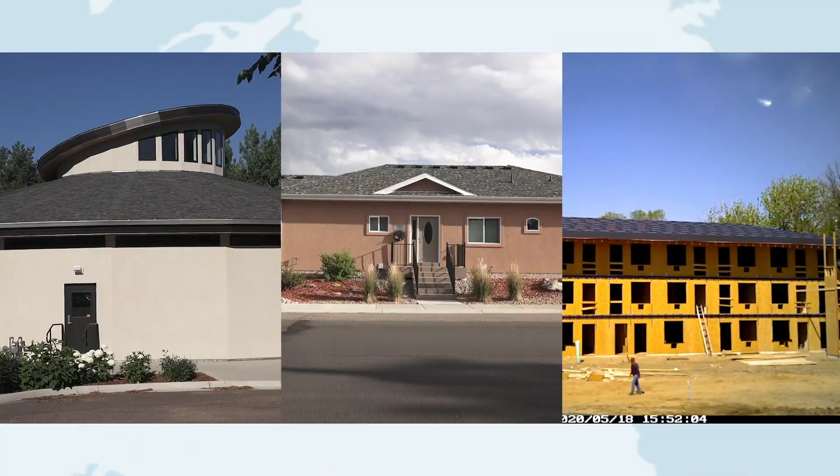Hi, I'm Paul Kreischer. For the past quarter of a century, I've worked to create more energy efficient homes and buildings. I'm fascinated by the technical aspects and cutting edge ideas from people who are pushing the boundaries in their projects. Equally important to me is the why behind the plan. What's the motivation for these individuals to make the effort, take the time, pay the additional money to take on sustainable and regenerative design and construction in their projects?

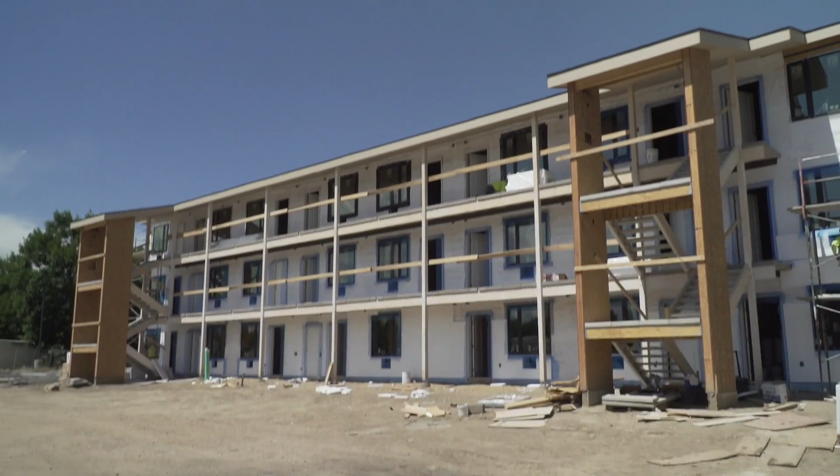We're going to take you on a journey to explore 3 unique construction projects: a church remodel commercial building, an innovative single-family home, and an exceptional multifamily building. Explore the design and the desire for each one to be examples of creating the buildings of tomorrow today, and to leave the world a little better than how they found it.

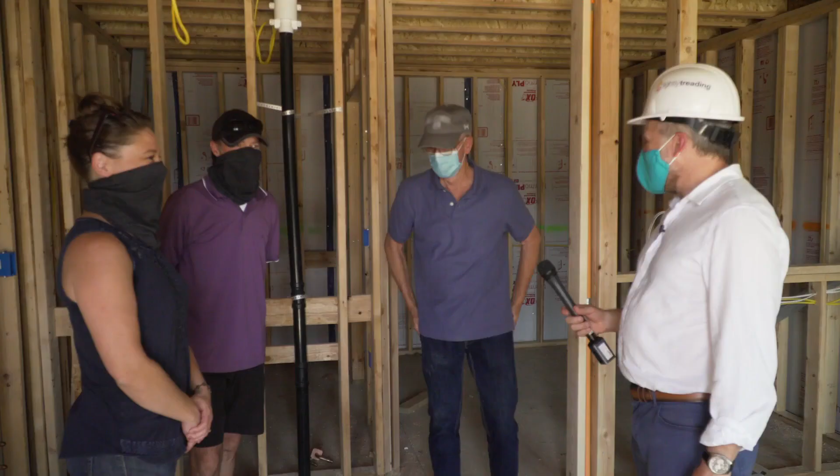When we recorded this video, we were 4 months into the US response to COVID-19. Shortly after restaurants began to open, but steps were still being taken for social distancing, and you'll see me and interviewees occasionally wearing masks as we move through these buildings. These precautions were done to protect the well-being of others and reminded me as to how we are all connected and need to truly care for one another as we move through life.

This connection between all of us is the fundamental reason for our videos, to showcase buildings which provide for our and all creation's greatest good by using less resources while delivering optimal performance for the occupants. May we all be well.

First Universalist Church members in Denver are a great example of living their values through the renovation of their building. The whole congregation got together and decided to shoot for zero emission, not an easy or cheap goal, but one they truly believed in. Let's head inside and find out more from these amazing people. We're talking to church members John Bringenberg and Milt Hetrick, Reverend Dr. Elaine Paraslua, and Communications Coordinator Jessica Montgomery about their goal to design a zero carbon footprint building. And while this green light has nothing to do with sustainability, it's a very cool design feature. Find out what it is a little bit later.

So Milt, if you'd be so kind, you have a brilliant mind in applied engineering that you did in helping this project come together, but tell us a little bit of your background, all the good street cred that you had through the schooling and work that you've done before quasi-retiring and then working on a project like this. Well, I got my engineering degree in aerospace, and I spent probably the first 10 years in aerospace. Left the industry and went into the oil and gas field for about 3 years. Was involved in some oil shale technology. Then ended up going back to aerospace where I retired. And in the meantime, I also got a degree in physics. So little did I know I was going to be applying it to a church project. And you did great work with it.

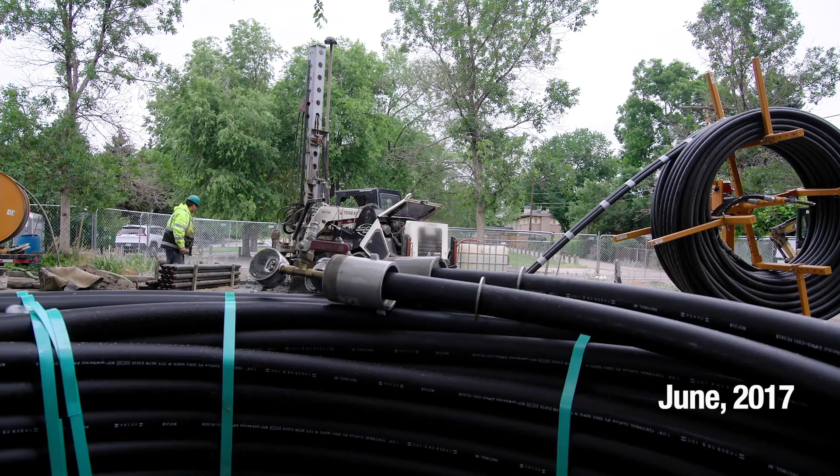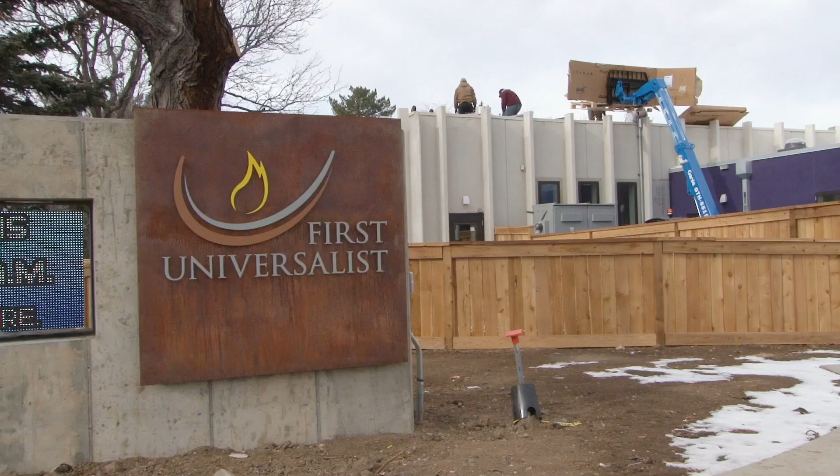So related to the church project, can you tell me briefly why you, the congregation, the people working on this, chose to do such a high-performance building instead of simply meeting code, like so many other projects? Sure. This project, we have to go back and recall that it got started around 2015. And at that point in time, the global community was becoming very concerned about the climate crisis, global warming, and that was the year of COP21 and the Paris Agreement, where the global community made an agreement to reduce greenhouse gas emissions and limit global warming to 1.5 or 2 degrees. So that was the big picture that was going on at the time this project got started.

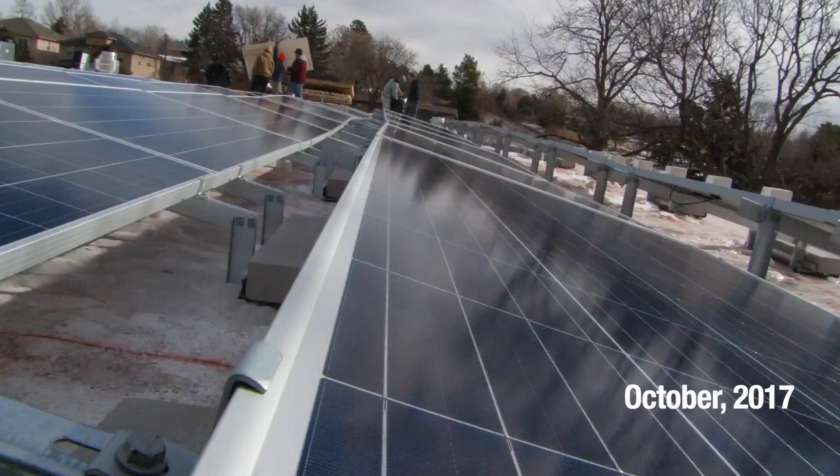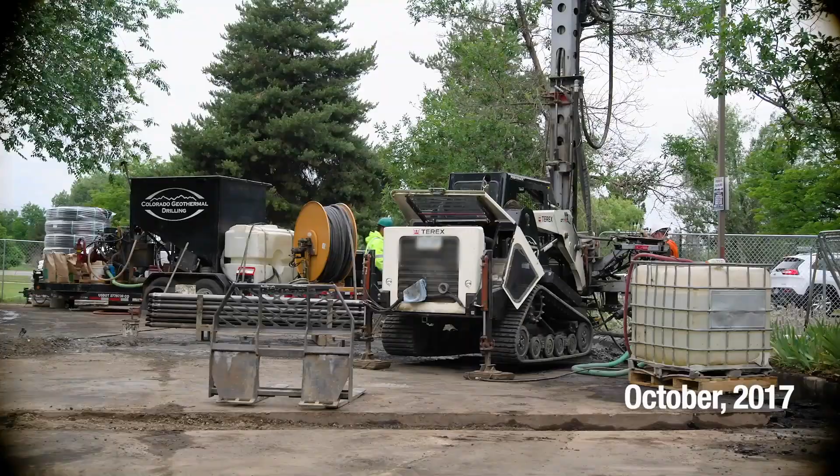Now, if we come down a little bit, our religious denomination, the Unitarian Universalist Association, had published what we refer to as statements of conscience. Within this church, we had a small group of environmental activists that we called the Green First Task Force. We were concerned about the growth of our congregation and that we needed more space, more classrooms, a bigger sanctuary. And so we initiated a building renovation project. And one of the members of our task force, John Bringenberg, got himself positioned on the building committee and made sure that we had sustainability perspectives as design requirements for this renovation project.

You know a lot about this building, about the whole process, but what I'm really fascinated by in this project was the why people came together to do this great project.

When you have a church community, you have a unique people environment to make decisions of this kind. We, of course, have to think about the economic impacts of energy decisions when we're redesigning this building. But being in a church community, you have the opportunity to bring in another dimension, something that maybe doesn't exist in a normal commercial business, for example. And in our case, that's what we call our seventh principle.

This amazing building is a manifestation of many beautiful principles and values that come from the Unitarian Universalist Church, and I'd love to learn more about that. I would say the general value of Unitarian Universalism is to live your faith, to live out the principles, and we have 7 of them, and they are about democracy, about how you treat one another, the dignity and worth of every human. But the one that's important to this project is the 7th principle, and that one is we are all part of an interdependent web of all life, and that we are to recognize our equity with all other beings, sentient and not, and the earth, and to care for the earth as stewards.

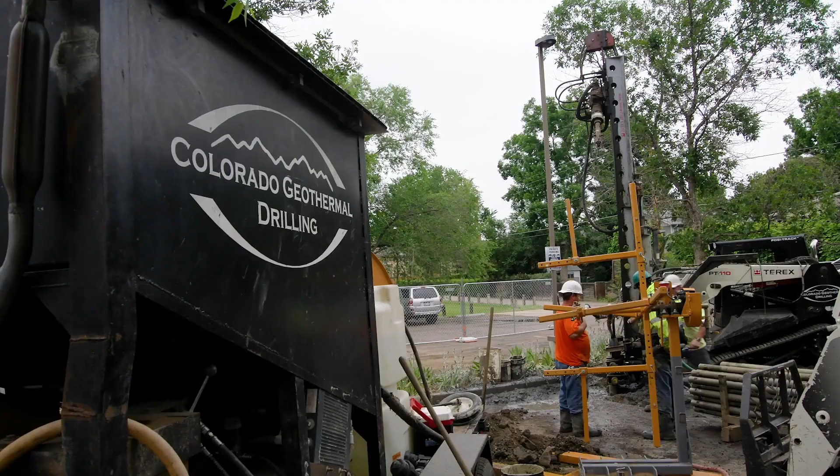Can you tell me a little bit about the story and the process of how people came together, especially around the funding portions of this project, to make it happen? Because it's a great story. It is, yes. We had a capital campaign for the building renovation well underway, and working with the architects, when a member-driven initiative, a very bold one, came up to add a sustainable energy system, and also add the cost for a sustainable energy system. It's challenging for several reasons. First off, it added more than 10% to the cost of the total building project. And being understandably debt avoidant, the church just asked, can we go ask for additional gifts specifically for the sustainable energy system, and then close the gap as needed with a member loan.

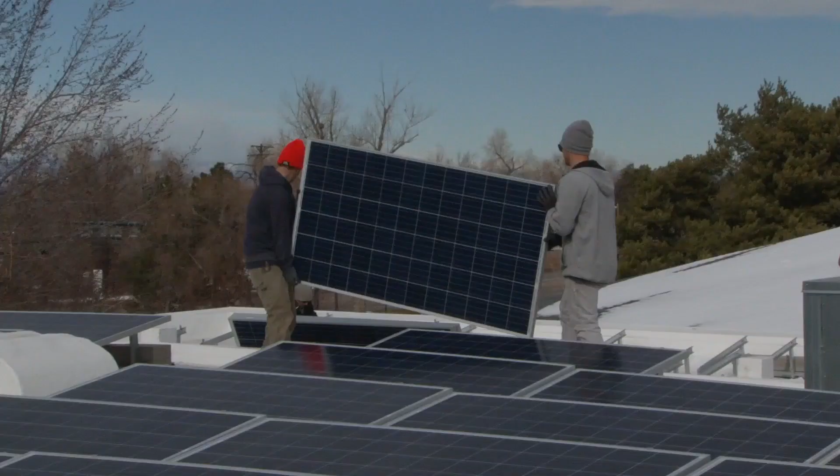So the community, as I heard it, came together and said, we're not going to try and get the maximum dollar out of the church that we can. We want to give a gift, but we need to get our money back, plus get 1.5%, you said, interest on it? Right. In exchange. That sounds like a beautiful win-win. Yeah, we thought that was a rather unique approach, because going in, the first response we got from just about everybody was, we can't afford that. Yeah, member-led, member-driven effort. We exceeded our goal in the additional member gifts, specifically to add the sustainable energy system to the building project. And then with the remaining funds, members came together and formed a general partnership, the 7th Principle Partnership. Cool. And that bold move paid off. We were able to see the project completed.

You were heavily involved in many of the technical aspects of this project. And I had the pleasure of working with you guys and being involved with doing air tightness inspections and blower doors and things. But can you tell me a bit about what you chose to do, let's say starting with the envelope of the building. Okay, great. This was a retrofit, so there was about 20% new square footage added to an existing building, which was restored and rebuilt. But in doing so, we were able to get nearly the entire building envelope with new insulation, including a skim coat of foam on the outside, batt fiberglass insulation, to bring us to about an R30 value in the walls. Which is great.

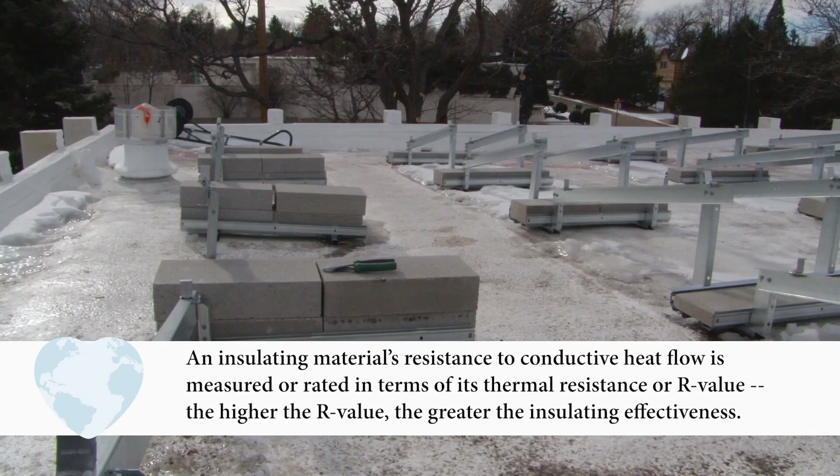We have a flat roof for most of the roof on the building, including the original parts of the building. And we were able to really beef that up. And we went from having about 2 inches of solid foam insulation to having about 6 inches, bringing us to an R value above 50. Which is really amazing, because your beginning levels, you were closer to like an R14 or R13 maybe, and to be above R50 up there is just outstanding.

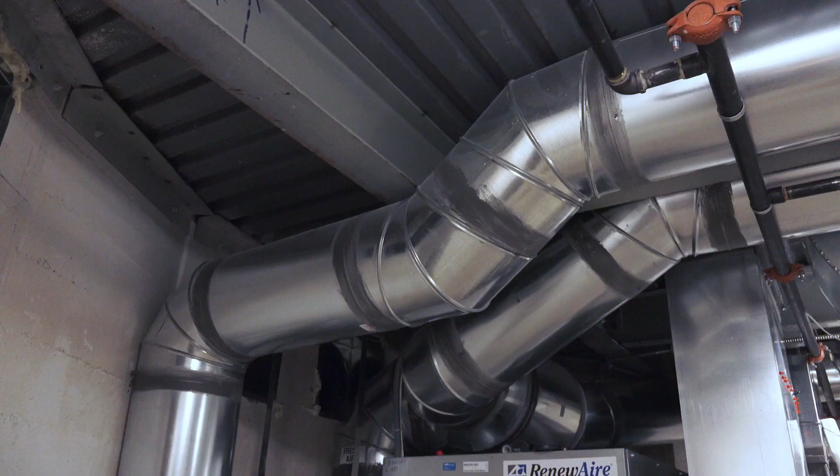In the design of the envelope, airtightness, making the building tight, was really the first parameter, and the R value was really a secondary parameter. We employ, for the first time in this building, 5 ERV units, and those ERV units work hand in glove with the envelope being as tight as it can be.

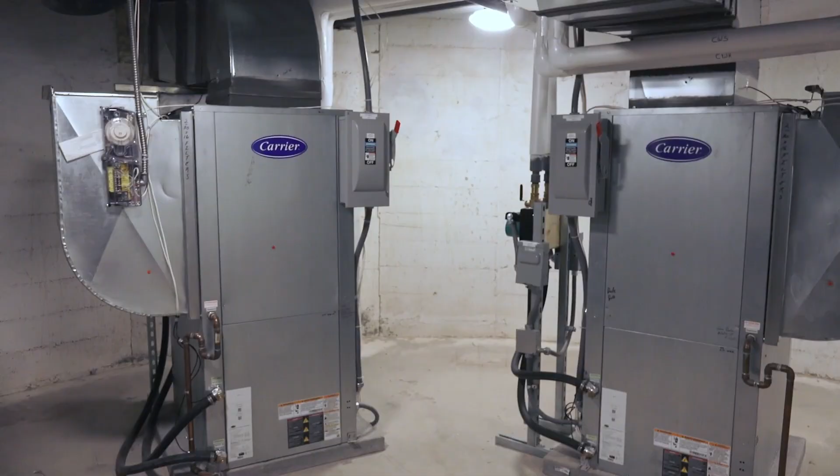Yeah. And one thing I can share, since I did the testing, is that the building came in at a test level of 0.188 CFM per square foot at 75 pascals, which is amazing, because code for new construction, not a remodel, but new construction, is 0.4. So you were less than half, as far as that standard goes for new construction. So you guys did some really good stuff with that part of it.

If I may, I want to ask you to get a little more in depth about the ground source heat pump system, the technology, because it's a new enough technology. I mean, it's been used in the Midwest for a decade or more, and in other cases, but it's still an exception. We don't see it in enough projects, and so you were quite innovative to bring it in.

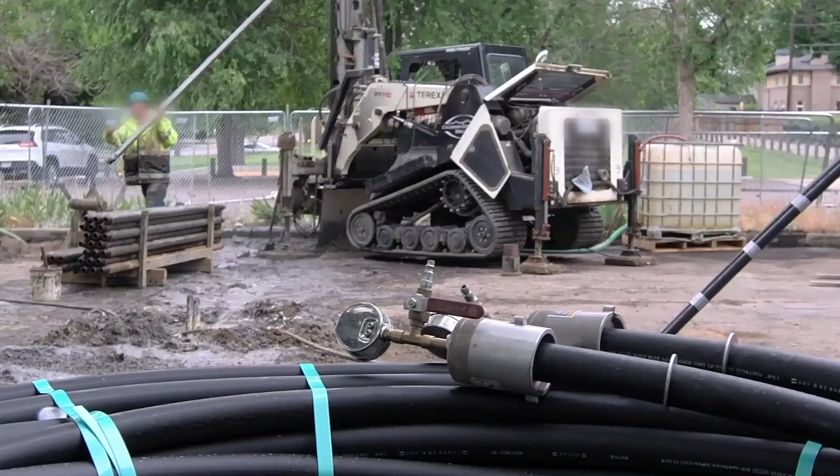Well, if this were a new construction and we didn't have a parking lot paved and landscaping in, we probably would have selected a so-called horizontal installation of these heat exchange pipes. Right. It's the cheapest way to do it, but... And how shallow or how deep would that have to have been? Well, they probably go down 6 or 8 feet. Okay. The alternative is to drill 5-inch diameter holes down and insert black plastic pipes in a vertical manner.

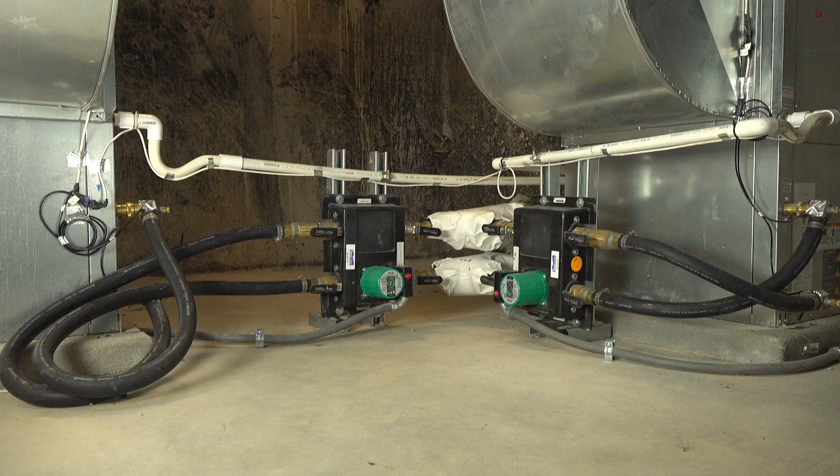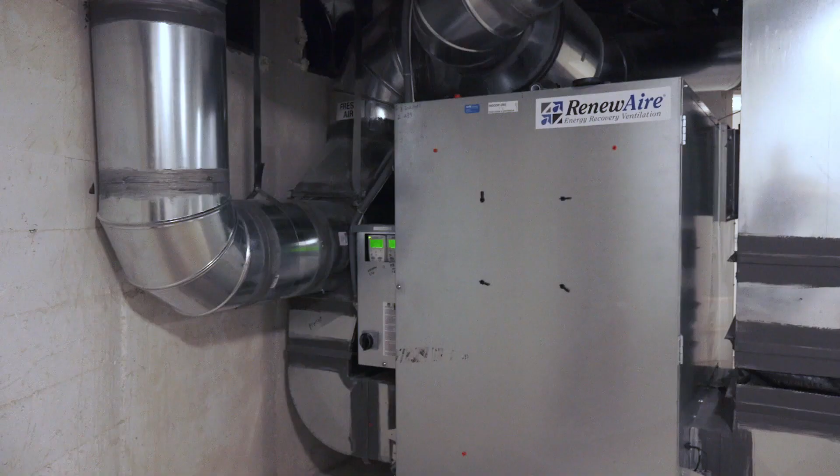The materials that you have in this building, the pumps, the piping for it, even the air handlers themselves with the water connecting back into the air handler from the ground source loop field, are just really off the shelf. I mean, they're just common products. There's nothing that's incredibly innovative with that part of it, which is great. Makes it easy for repairs and things like that going down the road.

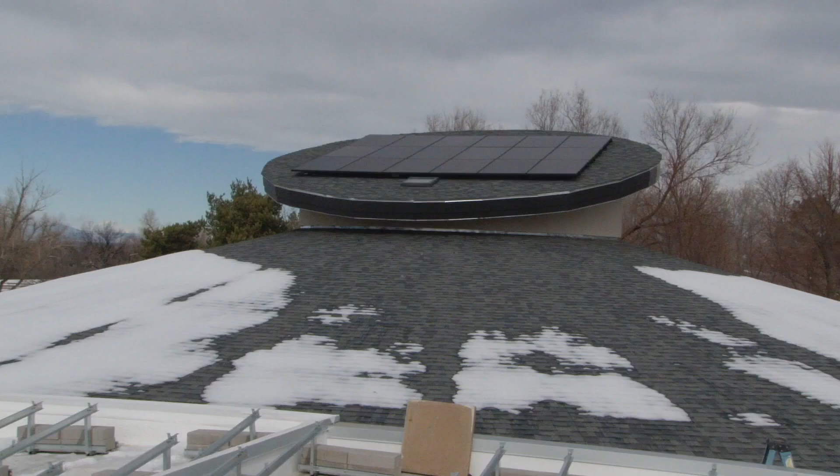So you were an integral part of having solar PV, photovoltaic, put onto this building to power a tremendous amount of this building's need for energy. So can you tell me a bit about the system you chose and how much it's helping offset right now for you guys? Yeah, thanks. We knew that being able to generate electricity on site was key to our goal of having a zero carbon footprint building. We planned a system that was designed to cover approximately 100 to 105% of our projected energy needs.

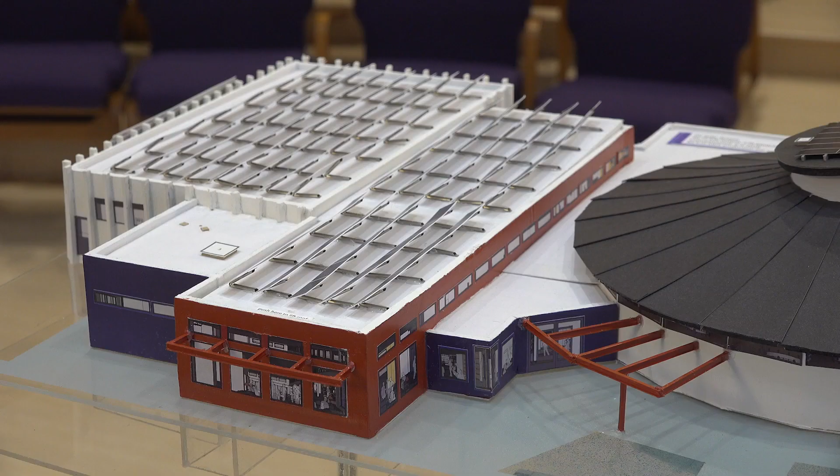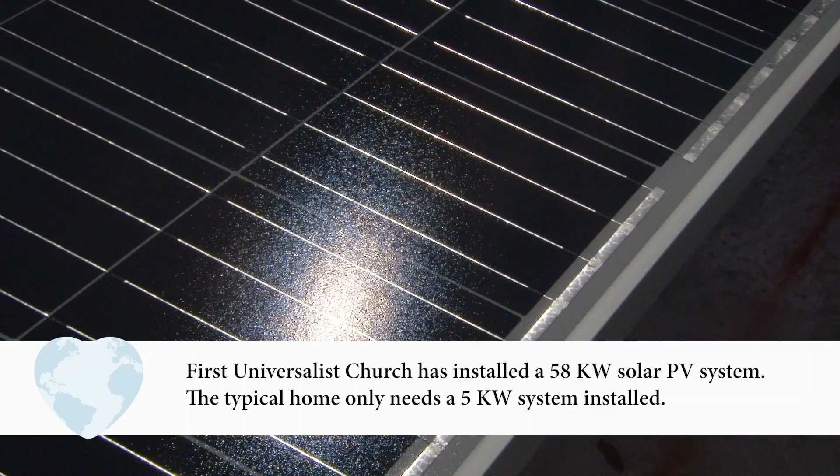Yeah, that's great. And we used about 80% of the space on the roof to accommodate that. So we knew that we had a little bit of room to grow if needed, and we have a system that is about a 58 kW system. It generates between, we'll call it 80 and 85,000 kilowatt hours of electricity per year. And we're now finding, after over a year of usage, that we may be a little shy of 100%, and we have the space on the roof to be able to increase the size of that system to make sure that we are at 100%.

And that's being given serious consideration, that you may add to it in the near future? That is correct, because we set out and the congregation agreed to a goal of being carbon neutral, and that's part of that equation.

So John, tell me what this great performance boils down to in dollars and cents for you on your utility bills on an annual basis. Our historic bills on the building, which was a little smaller before, were over $20,000 per year. We are now spending about 20% of that amount with the new systems in place, and I would say that the vast majority of those charges are considered base charges and demand charges. That's fantastic. That's really fantastic.

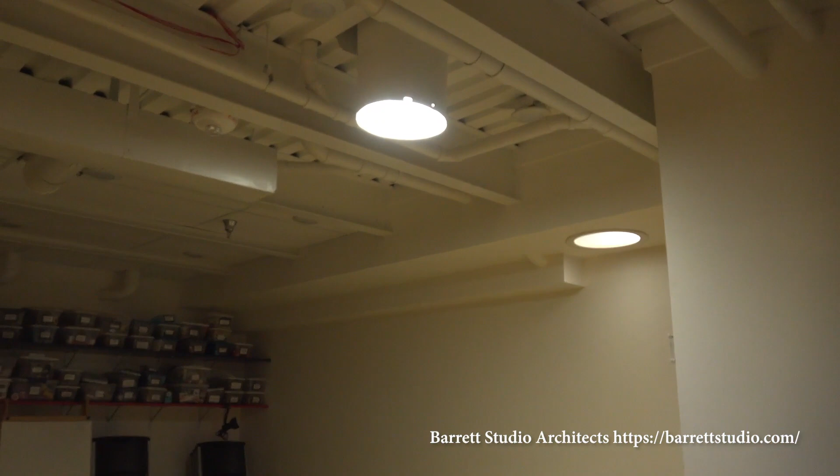So there are some beautiful things that you did with daylight in here. The architects that helped design the building placed a high value on daylighting and did their very best to be able to bring daylighting into every common space in the building. That was very challenging in the lower level, which prior to the remodel was a typical church basement with very small egress windows. But they were successful at getting some daylighting there.

Some of it comes through Solatubes from the roof. Some of it comes through some clever arrangement and enlargement of windows in the lower space. But there are other places in the building where daylighting is even more dramatic.

The space that we're in right now, we call Friendship Hall. It's a gathering space. And then our sanctuary has maybe the most important architectural feature. We call it the Oculus. It beautifully brings in light with north-facing windows, and it really does a great job of lighting the whole sanctuary space. For this building, it's our wow factor.

I'd love to hear from you because I see it as being part of your vision to be very conscientious about reusing and using recycled materials in the building. Can you tell us a bit about those elements, like what got reused, what parts of the recycling elements you're proud of? Sure, the chairs are one of many elements that we reused. So the green chairs that you see were our original chairs in our sanctuary, and we simply cleaned them. And as much furniture and other elements we could reuse, we did.

In our hospitality center, the ceiling panels, so that whole space was a sanctuary, as you may know, and that was the entire ceiling. And so they took them down and carefully preserved them. There are other materials, right, it was probably much more work to do the demolition in order to be able to preserve them. I think if I was going to pick one thing that symbolizes the intentions and the fulfillment of those intentions very much is the beauty of the wood.

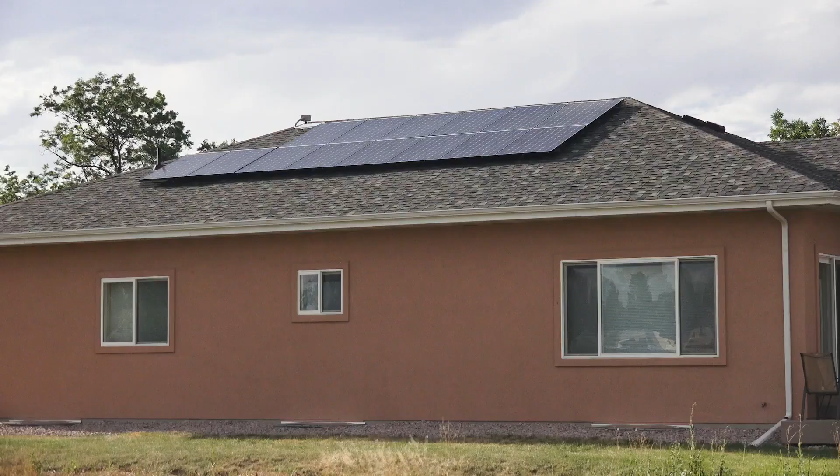You know? Well, that's really nice, get out of here quick. But I got interested in this home again because it was in the neighborhood. It was so different. And watching it being built, I was just always curious about it. Yeah. So how did you and Con finally connect? Did he bump into you? You call him?

When the home went up for sale, when it finally finished, I got the nerve to come up and come in and look at the house, you know. And they had an open house one day, and Con was here. I'd never met him before. Told me so much, it was over my head, but I could tell he was really passionate about, number one, the environment, but number two, people's health. He was really concerned about people being able to breathe well in a home, be comfortable, but also live economically. He was just passionate about all the good things you could do with a house.

So Con, in the case of this home, if you don't mind sharing, it can be ballparkish, but a typical home is about $450,000 in this size. Where did this home come in for you? Or maybe the other home across the street that you built exactly the same way. How much did that sell for, if you can share? I think this one was 5.25, right, Wes? Yep. Okay. The one across the street was just under 5, but we didn't finish the basement.

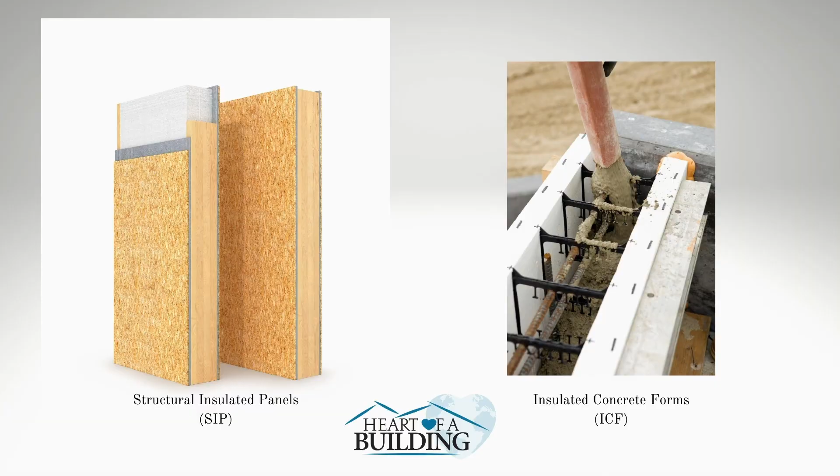So when you started building the home for the envelope, so the thermal envelope for it, tell me some of your choices and why you chose them. We evaluated the conventional construction, which everyone has done for many, many years. We evaluated some of the SIPS panel stuff. We did the ICF. So an ICF, insulated concrete form, it's going to have, in your case, 4 inches of foam. 2 5/8 on each side. 2 5/8, okay, on each side, and then concrete in the middle. Yes. Poured in on site. Yeah. Right. And we're insulated concrete forms all the way to the trusses.

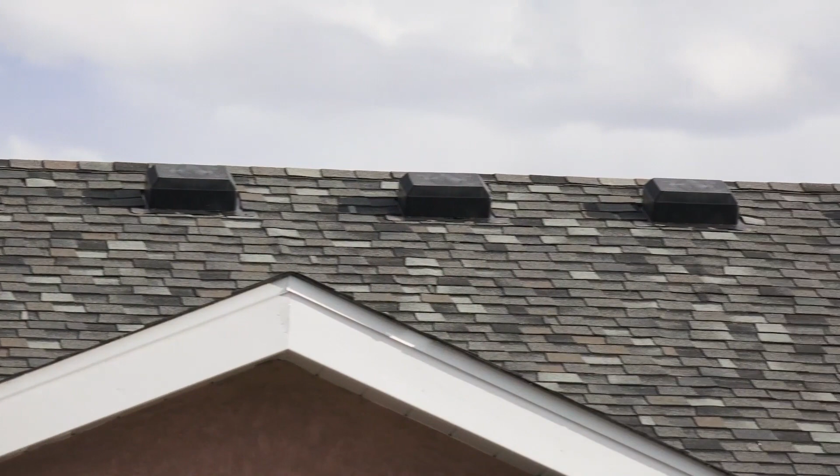We have high-heeled trusses. And so we sealed all the trusses from the concrete up to the baffles, up to the airspace for ventilation in the attic with foam. So that is all sealed because that's the biggest culprit in air infiltration in the house, heat transfer and air infiltration. And so we kind of covered all these little details. I've been working with energy raters like yourself through the many years, and with their cute little infrared cameras, and when we do the studies and we do the air blower tests, you can see many different things over the years. Right. And so we've pretty much put all that together in one package.

Hey, Paul, come on in. Hey, Wes, thank you so much. Good to see you again.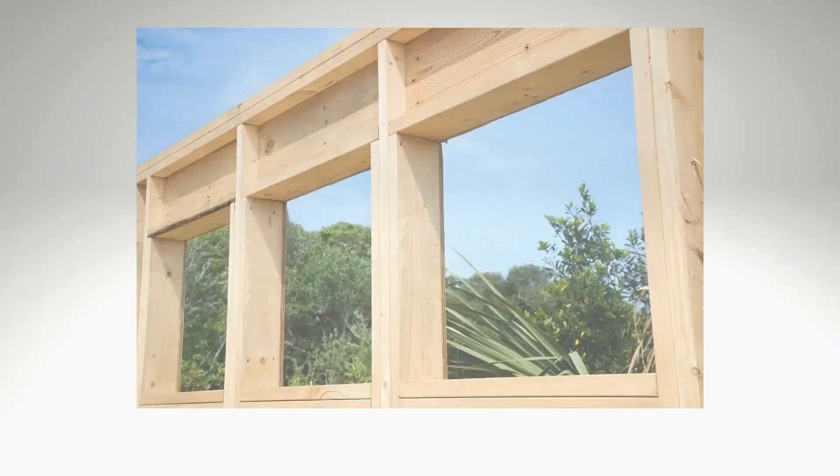Tell us about what you did with the windows and how you decided to orient the windows and orient the house, really, for the passive solar benefit. We set up the houses in the whole subdivision to best access our southern exposure. We use triple pane windows with argon gas. We use special window bucks compared to what most ICF builders even use. We personally build those and we insulate them, because a lot of them will put the wood window bucks in, and 25, 30 years from now, all that condensation has collected in there. You slam the door, the window falls out. Exactly. It leads to a lot of thermal bridging. It leads to a lot of air infiltration around there, which we've eliminated.

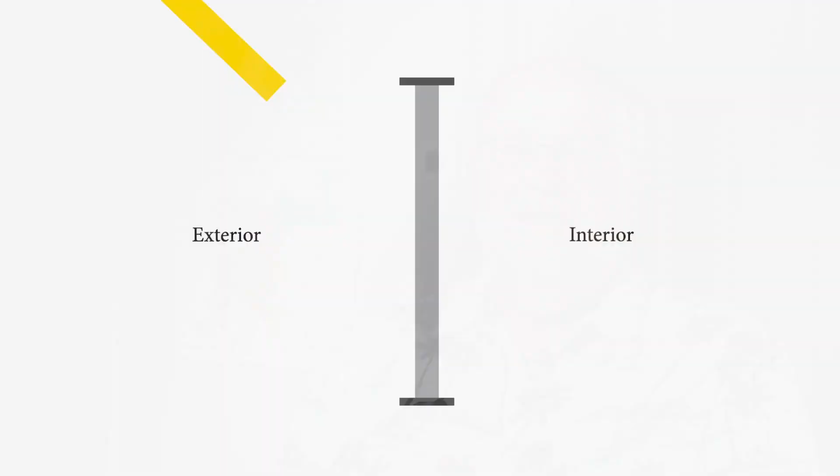You happen to know the U value of the windows that you installed? The fixed glass in here were 0.20. Okay. The operating glasses were like 0.21 and 0.23. Extremely good. And then, as I understand it, you did some different solar heat gain coefficients with the glass on the south side versus other sides of the home. Is that correct? We very specifically picked glass that will allow solar gain for us in the wintertime. Nice. And so we can have quite a bit of BTUs of solar gain in the wintertime, and in the summertime the glass reflects it off, and we don't get much gain out of it.

Tell me if I'm in the ballpark, I'm going to bet the windows on the south side are letting in 55 to 60% of the sun's? 56. 56, good. I'm in the ballpark. That's good. And then on the other sides of the house, probably only 25, maybe 30%? I think we're at 31 or 32.

Okay. I like the way that they designed this side of the home to be cool in the afternoon. So my patio is such that about 4 o'clock, 5 o'clock, there's a shadow there. Right. The way they shaded the home. And I said, that's so smart. You know, I used to have a retractable awning at my other house. I don't need that here.

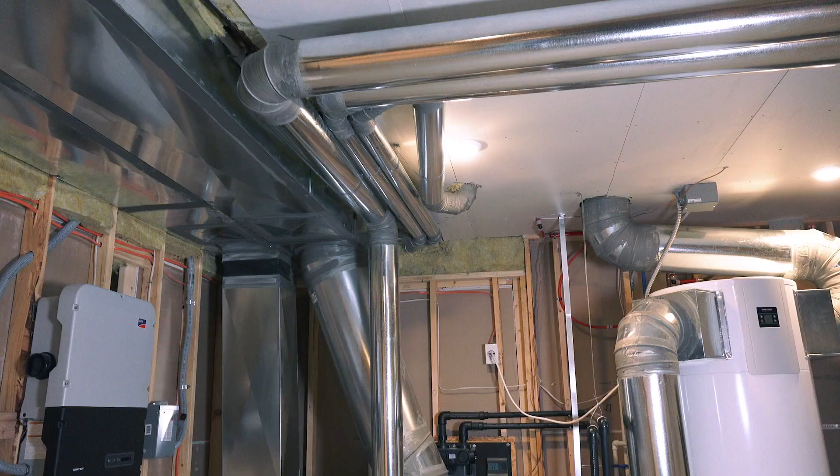My fascination in having known you and worked with you over the years is what you've done in alternative ways, once you've built a great envelope, to heat and cool it. And you've done some really good things here that aren't done commonly. You have a ground source heat pump system, so I'd love to hear about that. And then I'm going to ask you about how you went about sizing it, because that's part of the beauty of what you do with your projects. Ground source heat pump is the most efficient system; the EPA determined that many years ago. Ground source heat pump is the most efficient way to heat and cool any building that there is.

Tell me a bit on this one. How did you choose to install the system as far as the bore field went and some of those details? In order to size any kind of bore field for any system, you really need to do a good heat loss calculation. I've worked with many mechanical engineers over my lifetime, and they will do the heat loss calculations and they'll be double of what they really actually are. As far as the size of the equipment. Yep. And so by putting in oversized equipment, you take away efficiency.

It's like taking your little car and putting the biggest motor you can stuff under the hood and punching it at every stop sign. Right. That's the same effect. What's the size of this system approximately as far as the tons? 2 ton. 2-ton cooling. For a home, how big? There's 1,970 square feet per floor.

So a 2-ton system. I've done enough load calculations, I bet software I would use would say, even with your good envelope, at least a 4-ton is what I would have gotten from the calculations. That's right, that's what the software comes up with. Yeah. Then for safety, you needed the ERV.

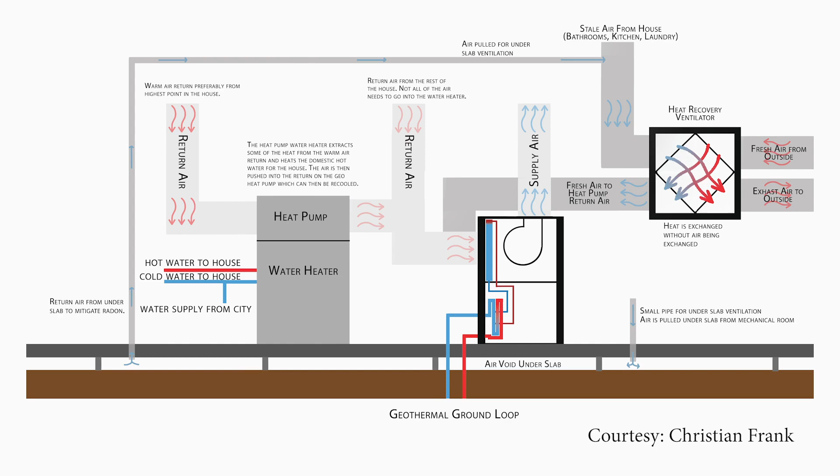So tell me about some of the cool design features you have built into this house, how you have air moving through this home, especially underneath the basement floor deck. We have a unique situation here where we had some expansive soils. And so we have a foundation that is lifted off the dirt. And it sits on stilts, right? Yeah. No, it's concrete. Oh, concrete, okay. And it's lifted 6 inches off the dirt. Okay. And so we got a void space under there.

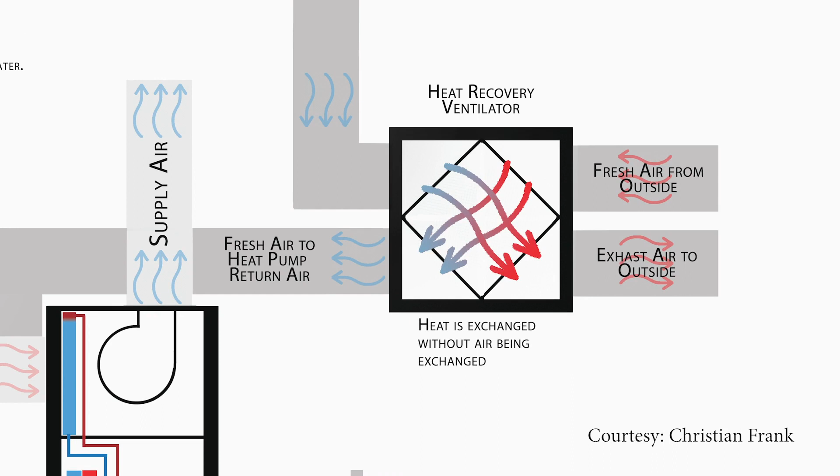In that void space, I have airflow that is connected to the HRV. And so we have constant temperature air from the mechanical room, which is where warm stuff is, water heater, furnace, things like that. So we pull that warm air from that mechanical room where we really don't need it, and we pull it underneath the slab, and we pull that stale air underneath the slab with all the radon and soil gas and all that wonderful ugliness that happens down there, and we dissipate it outside.

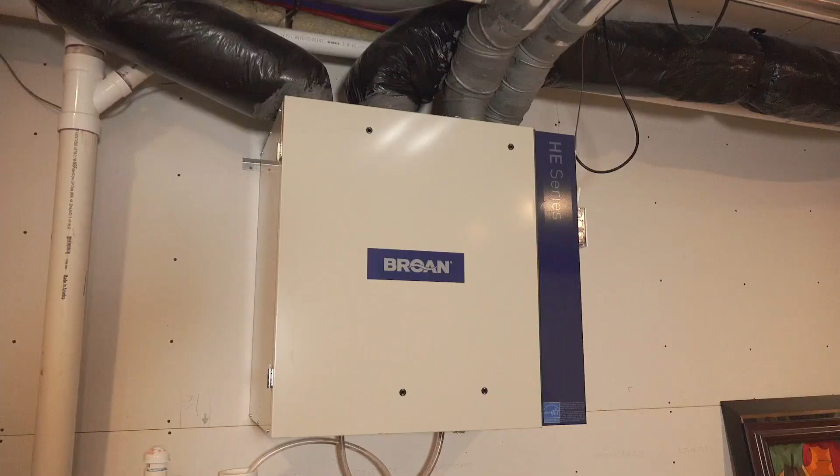So the ERV itself that you chose, who was the manufacturer, why'd you choose it, and how do you have it ducted in and around this home? It's actually a Broan HRV. It's an HRV. Yeah, it's a heat recovery ventilator. We chose the HRVs because once you seal up something this tight, and Mama starts cooking for Christmas and making a hell of a bunch of steam in the house, you need to dissipate that moisture. Right. And so that's why we chose the HRV.

And so we have sensors in each one of the bathrooms, the laundry room, and the kitchen. That's where you make your pollution mostly. Doing laundry, cooking, going to the bathroom, taking showers, whatever. Right. And so the HRV runs at a continuous flow of like 68 cubic feet per minute to keep the air fresh in the house. Once you step into a bathroom or the kitchen or laundry room, it'll ramp up to 200.

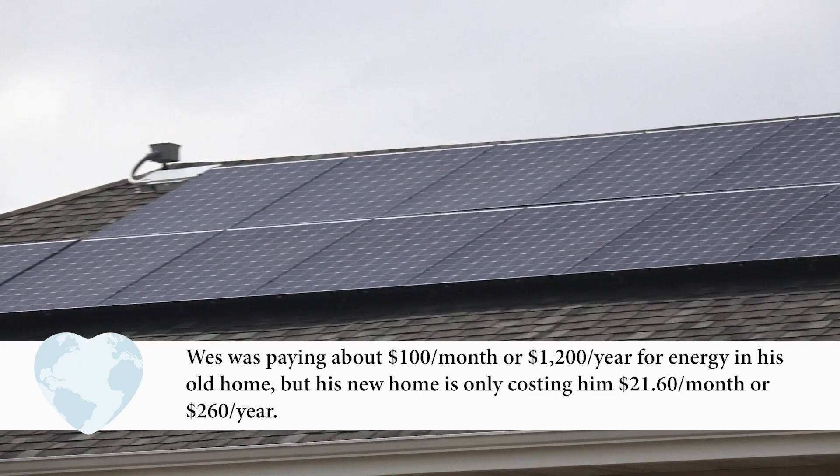So Wes, as an accountant, I love this about you. You've been tracking the data on your utility bills and how your solar PV system has been performing. My other home was about half the size of this one, maybe a little over half. But that house had about a $100 a month average utility bill. And this house in 2019 had a utility bill of about $260 for the whole year. That's fantastic. And I get cooling in the summer, whereas the other house was hot in the summer.

Tell me a little bit about this electric air source heat pump water heater that you put in. It comes from Germany. They have been using them in Europe and in Japan for 25 years. Right. Because their electric rates are 3 times what ours are. Right. And since we were going all electric in this house, I explored quite a few different manufacturers, and I came up with this system, but they don't sell the airflow kit in this country. Okay. They only sell the water heater. Okay. And so we had to make up our own airflow kit. And the airflow kit, just to interrupt, is because it's an air source water heater.

Heater. Okay, it's a booster fan? All it was a booster fan, a very noisy, holy crap, hold on to your hat booster fan. There's a high return at the ceiling. Right. We're pulling the warm air off the ceiling where you never heat it. Right. In the summertime, you're getting radiation through the insulation even. Right. So you've got all this warm air stacked at the ceiling.

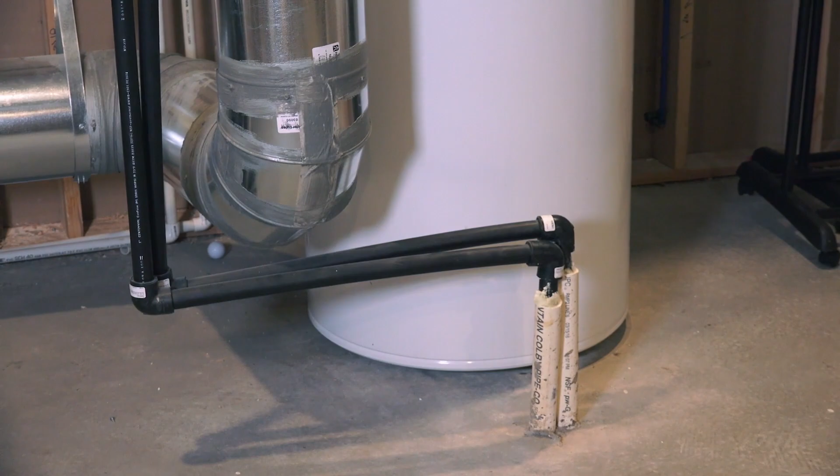Right. And so when the water heater needs heat, it starts pulling that warm air off the ceiling, runs it through the water heater, extracts 6 degrees of temperature, and deposits it into the return of the furnace. Oh, okay. There's refrigerant coils that go around the tank in the water heater, and so that's how it exchanges the heat. All these things are amazing, in my opinion, in this home.

And you've built an all-electric home that is affordable. Tell me a little bit about why you did this. Why an all-electric home? To prove that it can be done. Okay. Because people are telling you you couldn't. Everybody says that in order to do what we're doing, it's going to cost several $100,000 more.

So Wes, you've shared enough with me over time that we've known each other about how you care about many big picture things, whether it's connected to your church, things with working with underprivileged youth. Seems like that's part of your decision making in getting this home. Am I right? You're right. I hate to admit that, but yes, you're right. That was part of the decision making with the home. I've always felt like if you could use less resources, you're going to help the environment.

And I went to an energy conference at the First Universalist Church, I think it is, and really learned more about the impact that using energy here has in other places, in poorer countries. And so I didn't realize how much of what we enjoy hurts others when we're irresponsible about it. So that also had an impact on my decision to do this, because I didn't need a house.

I had a house, paid for, I was retired. So value is beyond the ledger sheet, beyond money. I know. I'm probably going to lose my CPA license. But yes, there are valuable things besides money. There's people's lives and their well-being. I'm deeply impressed by the passion of this builder and this buyer to have high levels of sustainability in this home that is attainable for middle-income people in our country.

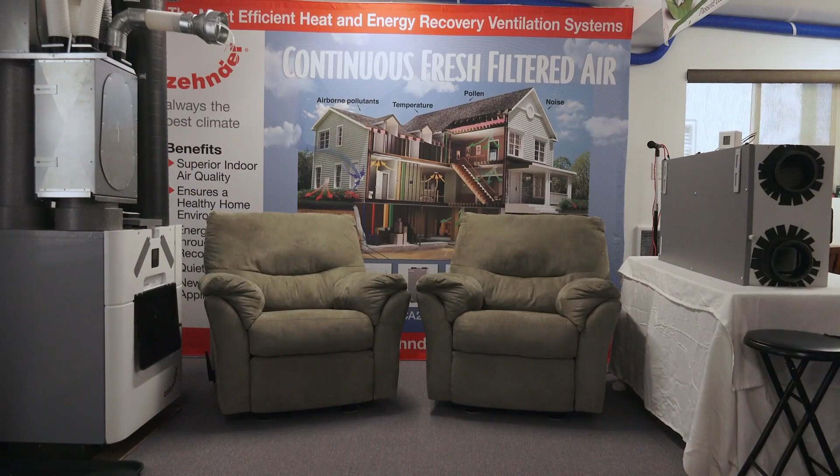Mainstream Corporation's office is a converted barn in the shadow of Long's Peak. It's turned into a Passivhaus compliant building because of a sealed envelope and a mechanical ventilation system that purifies the air. Find out just how quickly the air is purified later in the program.

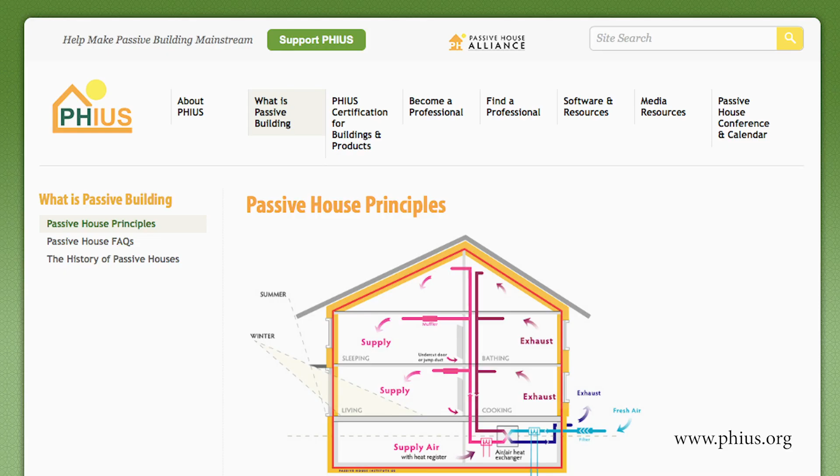The two of you are doing some amazing things when it comes to making buildings more airtight, encouraging the whole Passivhaus standard. Why are you leaders in moving this forward? I think Lisa and I founded Mainstream to make things better, to fix things that we saw that were wrong. And so the why is simply because we see that the current building stock is wrong, and because we have kids, we're building for the future for them.

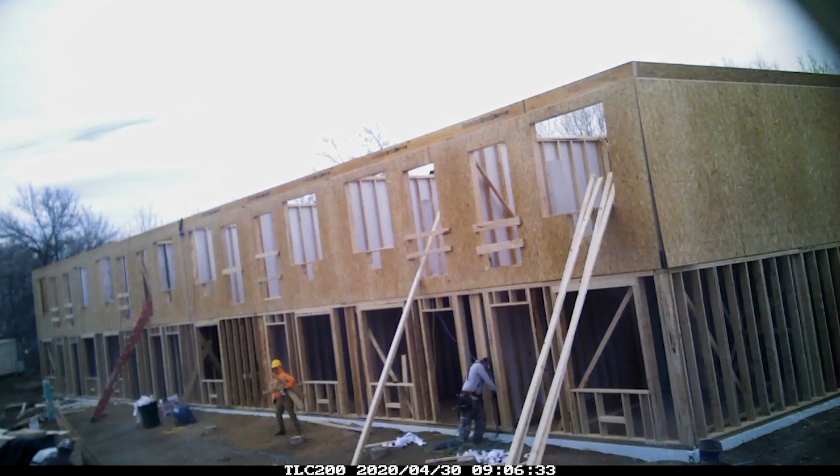You guys have several projects, but we're focusing on this under construction Greenspire project. Yeah, the owner's amazing, and it's a project that lit up Mainstream's interest level. When I met Cody, he enjoys this, and when he saw what I was doing, it just excited him. He was just all for it. Finally, we had somebody who was receptive to the science, who asked the right questions, who was doing it for the right reasons. On this scale.

Right. Probably something that really made me work on it hard is I told a lady at our church that it was impossible to build a 450 square foot unit; the restrictions would be so great and the expense would be so great that it just was impossible. She got a project through the city called the Micah Homes that are affordable, through a group called the In-Between, which provided that type of housing. Transitional from homeless into some sort of housing? Right. So she did so much to help affordable housing. She broke the mold because mine are 300 square feet, and when she started, the city required 450. So she has helped, and this was something that I needed to do for her.

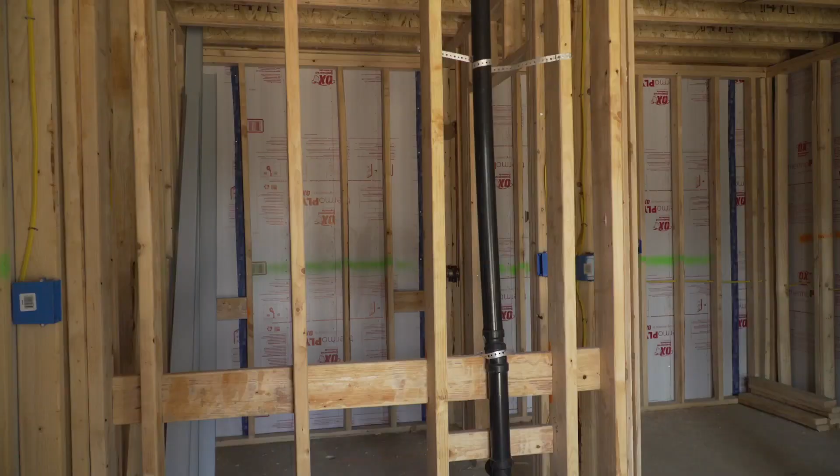Is this project going to help people coming from homelessness into transitional, or is this meant to be more of a market rate? We are tied in with the city with 10 affordable units that we have to meet certain requirements. But because of the way they're designed, only 300 square feet, they are all well below the city's requirements. And that is the secret to affordability. Is its size? It's the size. Well, at the original, 2.5, 3 years ago, 450 down to 300, that's 30% smaller. And that lowers the cost 30% for rent. Its size is a factor.

I didn't have 44 of these built without knowing what one looked like. So I built this unit in my basement. That's awesome. Because you just don't want 44 of them there. And so you tried out how it would feel to live in that, right? Yes, yeah. So, we had several principles. It had to be viable economically and investment-wise. It needed to really do something about the homelessness. And to me, it had to be 21st century. The code is so far behind and technology is moving so fast ahead.

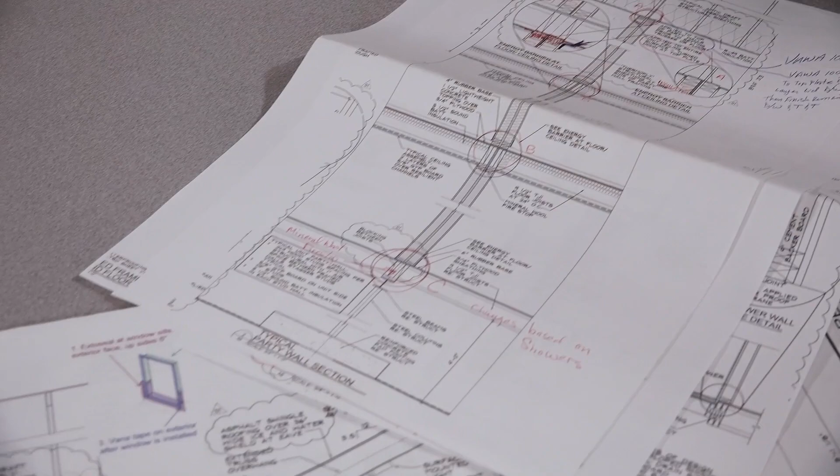I have to interject that you, at one time, were a building inspector, correct? So you know the code really well. I spent 11 years in code review and building inspection, and it's not keeping up. So I wanted a 21st century building and renewable energy. I do not want to face my grandchild knowing the mess that I've left him. I'm responsible. No, you're responsible. We're all responsible, and I've got a few years left. Maybe I can correct a little bit of it.

Now, before meeting Cody and then Lisa, had you heard of Passivhaus before, or had you not even heard of that previously? Not Passivhaus. Right. Passivhaus has its own modeling software. Passivhaus Planning Package is how it started. Internationally, they still use it. And then with all the climate zones in the United States, PHIUS created WUFI Passive. So that's the software program that I've... What does WUFI stand for again? I'm sorry, but it's in German. It's in German, right? Yeah, it's probably safer if we just spell it and leave it at that.

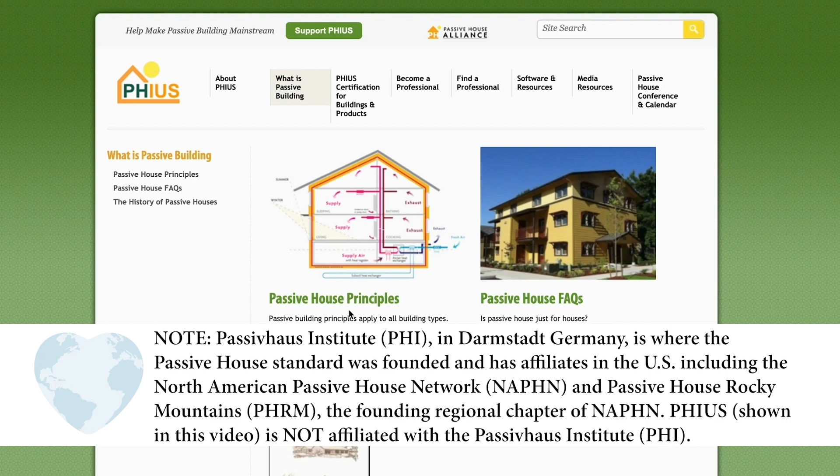It's a hygrothermal model that's parametric and is attached to the elements of the WUFI Passive modeling program. So it does what other Manual J softwares do as far as heat load calculations, but it's more accurate. It takes air tightness seriously. It incorporates internal heat gains. When you get down to the micro loads, this is the software that we should be using. She likes gritty language and spreadsheets and fancy graphs, and she's very good at it.

But beyond that, she gives our clients an opportunity to just ask anything they want about their building. For example, what if we switch the insulation because this insulation is more friendly to the environment? Right. Or this insulation is cheaper and I can use it in recycled form. Right. And all those questions are just a phone call away.

So Lisa, you've told me rules of thumb for Passivhaus, the idea of an R40 underneath, an R50 on the walls, R60 for the ceiling or attic. For Greenspire, you're really close to that, but what'd you end up using and then why? We are very close. We're about R38 where the floor meets the crawl space.

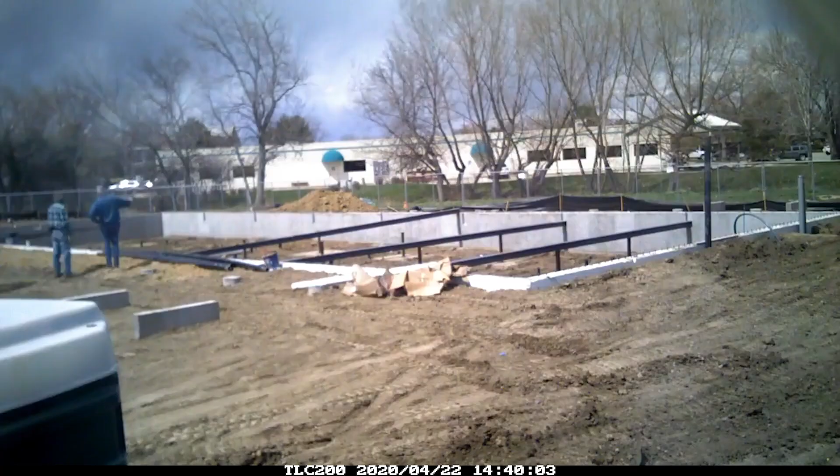Nice. And then the walls, we did push for a little bit more rigid insulation than we got, so we landed at an R30. Okay. We have 2 inches of rigid foam on our framed walls. Nice. And then the roof itself is an R60 as well. And then each of the units is airtighted from each other. Trying to stop the smell of people's food drifting over to that place next door. Yes. Very nice. Lots of design meetings taking those details into specific consideration.

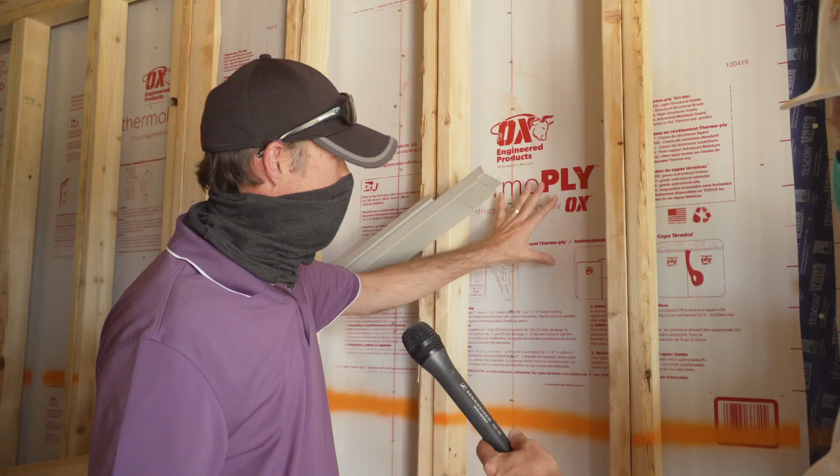This team has already done more on this airtight detail than you'll see on the average construction site. We'll come back in here and button it up even tighter because we want Passivhaus airtightness in each of these 300 square foot units. So a quick air barrier inspection that Mainstream would do would be to come in and see what is the continuity of the air barrier. And that means is everything connected properly on all 6 sides of the building or the area that we're in.

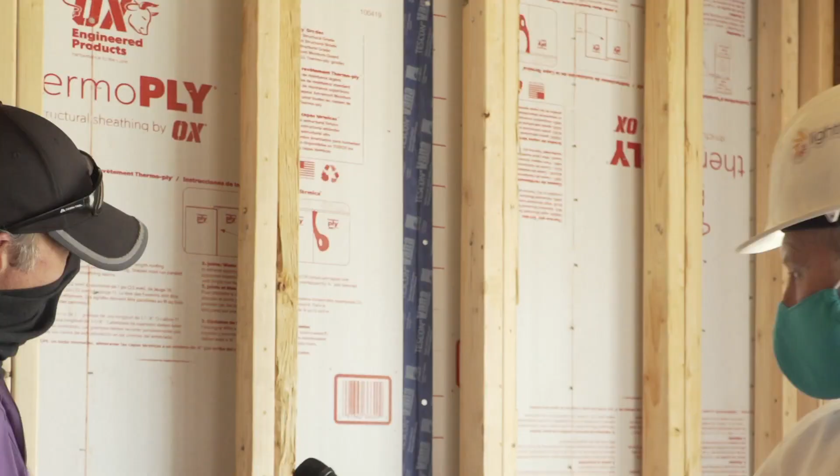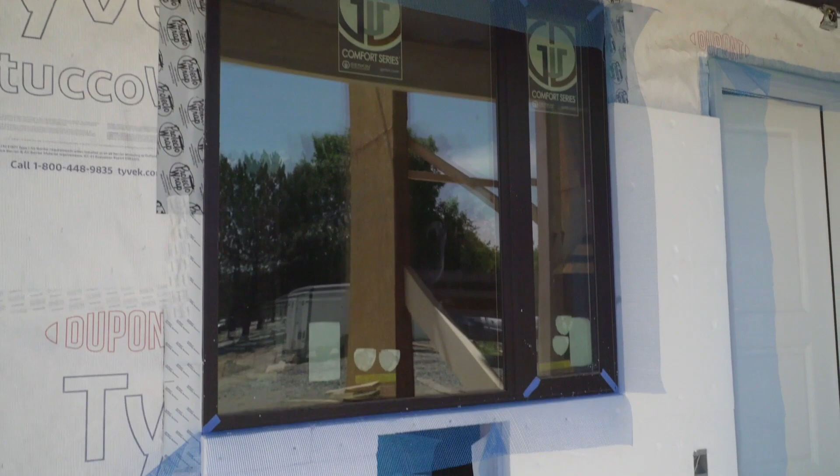So move on over here. We use Proclima vapor open tapes, and the reason is because people sweat and they breathe and they cook, and so we don't want anything getting trapped in our walls. And then the walls, you got 2 inches of rigid, so XPS, is that correct on the outside? EPS. EPS, okay, so expanded polystyrene on the outside. Yes. Good. So that's about an R8 on the outside? Yeah. Then what do you have in the wall cavity?

Cellulose. I think the cellulose argument's a really good one. And that's something that can change in the field. It's common that a Passivhaus will spec cellulose and we'll end up with blown-in fiberglass or something. Okay. We like cellulose because it's a recycled material and it's very anti-rodent and bug. I agree, yeah. Fiberglass, rodents don't have a problem with, but cellulose, they don't like it, the borate that's on there.

So that's good, yeah. But dense packing it in, it'll surround all the wiring and everything. It's very tempting, you'll see batts in normal situations, go in and slap them in, but then you have little air pockets, and that's the other part of our science: we don't want any air pockets in any of our assemblies. This is how we do it. Yep, that's excellent.

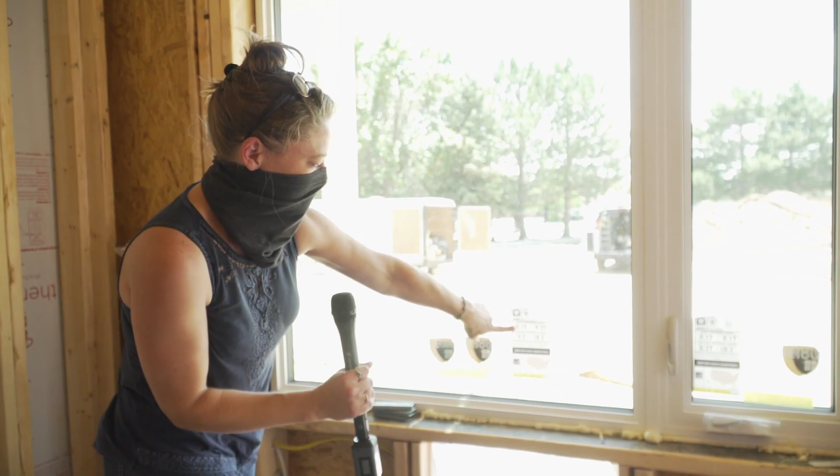So here again, the collaboration of Mainstream with the clients, you learn things from your clients. So it's very good to be open-minded in their team. We went from a fiberglass to a UPVC, and the budget savings was significant enough. For the framing of the window? Yeah, UPVC versus Alpine's fiberglass. Okay. We got double pane, so you don't always have to go triple pane to get the low U-value or the high solar heat gain. So the technology in the windows and the availability of those products is happening. So Gary found that golden nugget. That's fantastic.

And do you know, with all of this, we were almost certifiable for Passivhaus. Yeah. The heat load is the one that I kept fighting, and I couldn't really nail down how to lock it in. But even the primary source energy, we meet the threshold for Passivhaus criteria under 6,200 kilowatt hours per person per year. Right. And that I will attribute to the solar hot water.

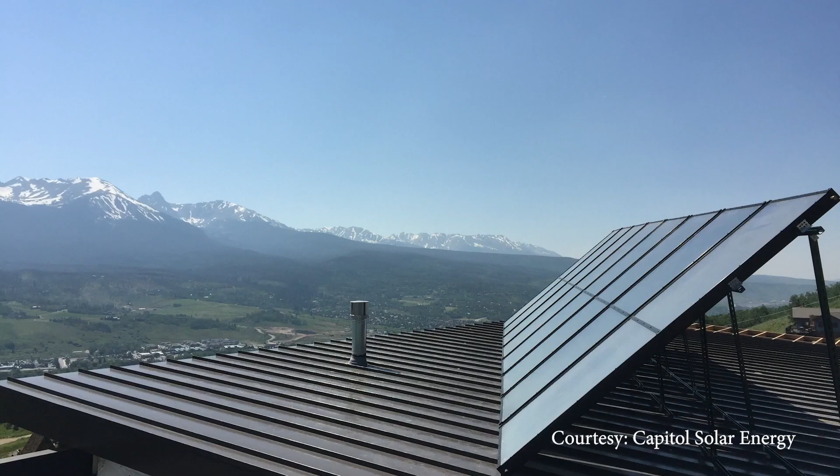Okay. One thing I'd like to ask was about a technical detail in the project, the solar water heating part of it. Some people think that's an older technology, but boy, it's going to work for your project, as I understand it. Well, you're correct. It was old technology.

The inspiration came from the fact that the number one heat load in those units is hot water. Now, I also knew that I could use renewable energy through the city and my own solar, and I could just pay for the resistance heat. But when you started looking at the hot water that comes out of the shower and goes down the drain and is gone, it was just amazing. It's just way too much, and so we attempted to recover that. There's no designs. You have to think it up yourself.

And then again, through Cody and Lisa, the solar hot water, solar thermal, and when we got the information on that. And so we introduced Laurent Malone from Capitol Solar. He's got a great French accent. He's a super intelligent, wonderful guy. He was perfect for the project. And honestly, that introduction was exactly what Gary needed, like, hey, this is that cherry that's going to take this project from an almost to something else.

Yeah, and that's what's beautiful is the pairing of a great envelope, and then simpler mechanical systems, and then bringing renewables in. Like you said, that's really what helps on the carbon footprint side, the energy use per person side. So this is a huge negotiation of using off-the-shelf, cheap resistance heat. But wait, if we go this cheap, we can afford this huge solar thermal system that's going to do all the heavy lifting anyways. It takes smart, educated people working with smart, curious, educated builders and developers to make that happen.

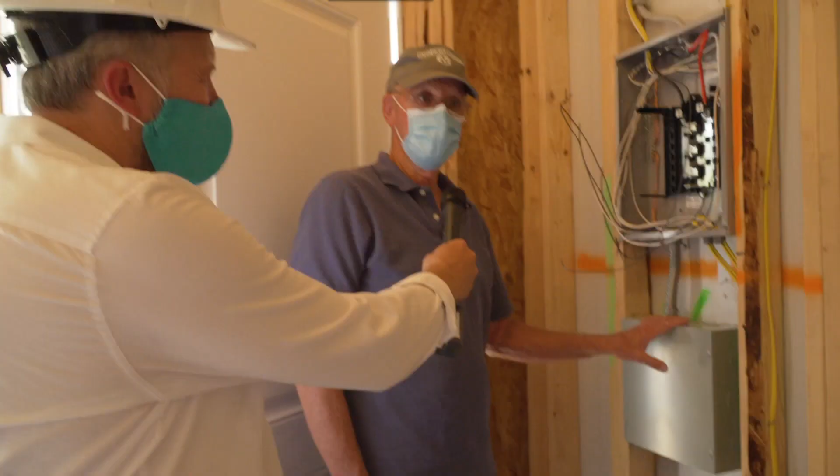One of the smart ways Gary is preparing for the future of electric utility policies is by placing demand control meter boxes in each unit. In the future, every place will have a demand meter. Throughout all units, each unit has one of these. It will shed loads to keep the total demand below a certain level and probably save as much as $2,000 a month.

Well, one of the fun things we found on this one, we went back and forth trying to get it to be a certified Passivhaus apartment building, and it fought back. The resistance was hard and the force was windy and all this stuff. But what we learned was that multifamily is a lot easier to take to Passivhaus certification. Every time we have the opportunity to take one to the mat, to take one full passive, we run it through the full gauntlet, the ringer.

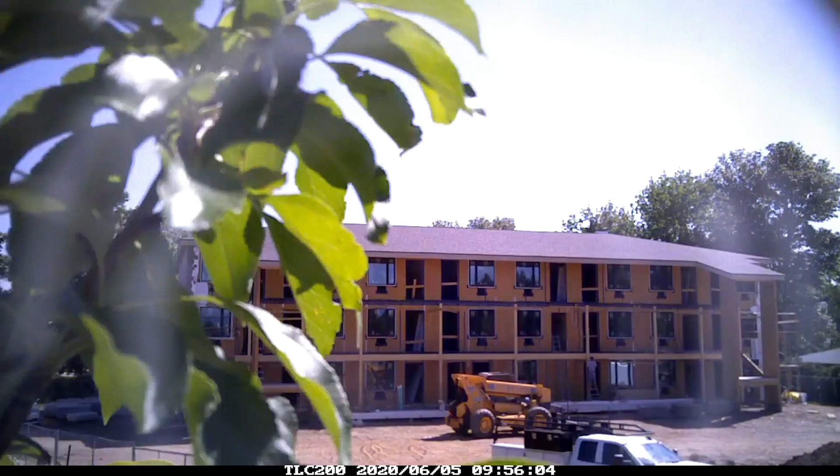This one has bothered me just because you want it to be certified. Colorado needs it, we need a multifamily, and we would like to be the company that helps make that possible. But by the same token, it's an amazing building. It's almost passive. It's got all the big passive elements in it. It's going to serve a big need.

I'm dying to do another one because there's just so many things I'd like to do just a little bit better and get to that Passivhaus and a little past. Because I see that with a little bit of thought, you could hit that every time easily. And I'm excited about that. But not till this is done. I gotta get this one on the books. It's amazing what purpose can do to you in the morning to get out of bed and chase it.

And I will tell you that when you're in a Passivhaus or in a space like this where it's very comfortable and even and it nourishes your soul, it's purpose. Some people find purpose in money, some in family. I certainly do in family. But beyond that, it's making the world a better place, fixing something that is broken.

Remember when we wondered just how quickly Mainstream's Passivhaus office purified the air? Let's let Cody tell us. Almost half the room is purified within one hour without hearing it. Thanks for bringing that up. Yeah, it's wonderful.

I hope these stories have truly inspired you as much as they've inspired me. I look forward to seeing how Cody, Lisa, and Gary's project comes together and revisiting them for an update after residents have moved in. I also look forward to meeting other creative designers, builders and developers who apply the cutting-edge designs shared in our videos to create more and more regenerative structures until they become the norm rather than the exception. Also watch the technical side of each project in our accompanying video and see the documentation on the Heart of a Building website.

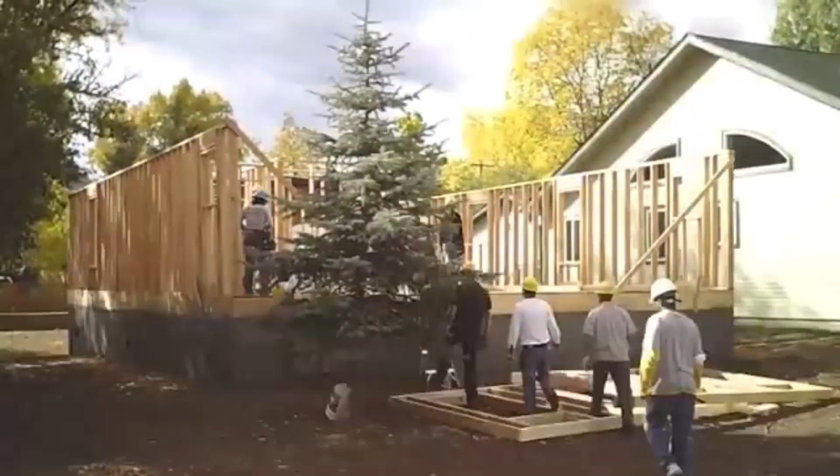My name is Steven Stanek-Scott. I am the construction director at Habitat for Humanity of the St. Vrain Valley in Longmont, Colorado. We build affordable housing. We try to do that for the people that are in our community.

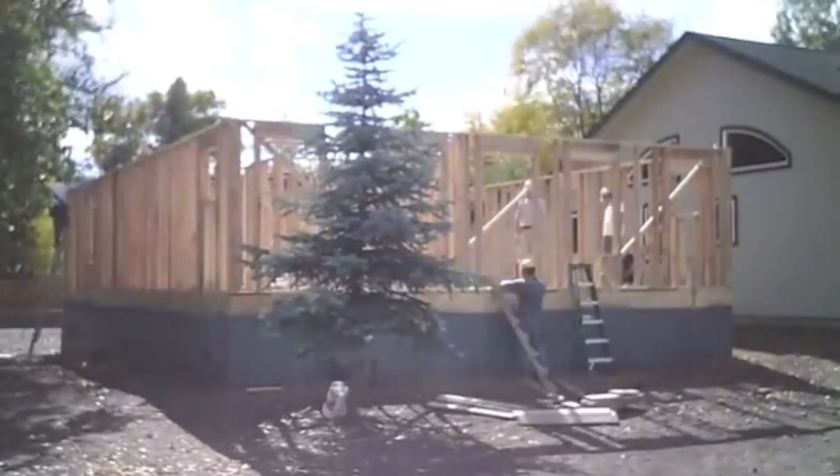When we think about affordable housing, typically you only think about the mortgage as the cost of a home. But what we really have to realize is that the cost of a home is the mortgage, the property taxes, and the energy bills. About 10 years ago, we really started looking at energy efficiency in the construction of our homes, looking at things like LED lights and energy efficient appliances.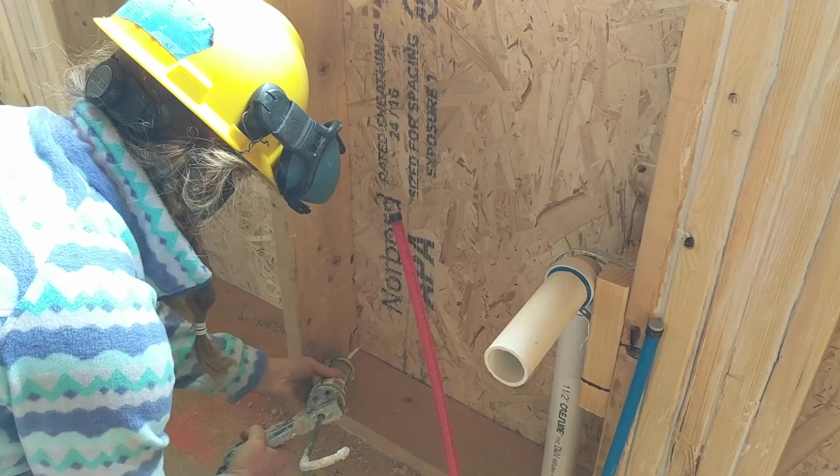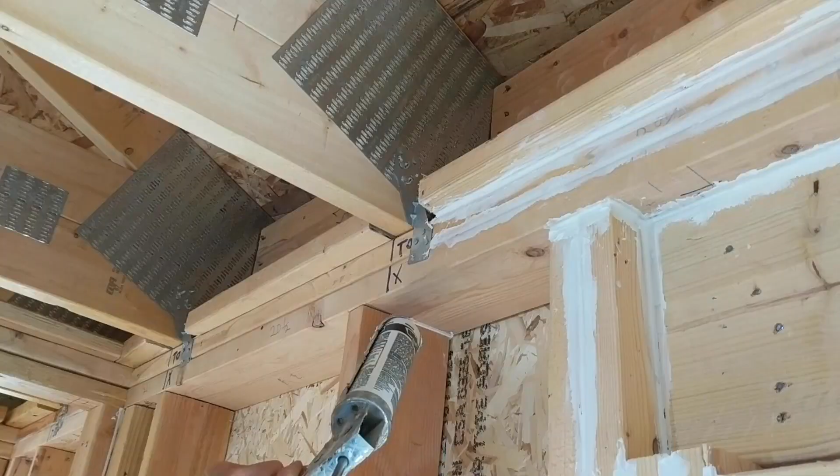But then we looked really deeply at what we're actually using energy in the home for. And that was keeping the home comfortable on the inside. So heating and cooling the house is what you use the most energy on. So we started off by really trying to seal the home up, and we did that with volunteers and tubes of caulk. So we went through the house and we were very diligent and deliberate about closing off any sort of openings that we could find anywhere to the exterior with caulk.

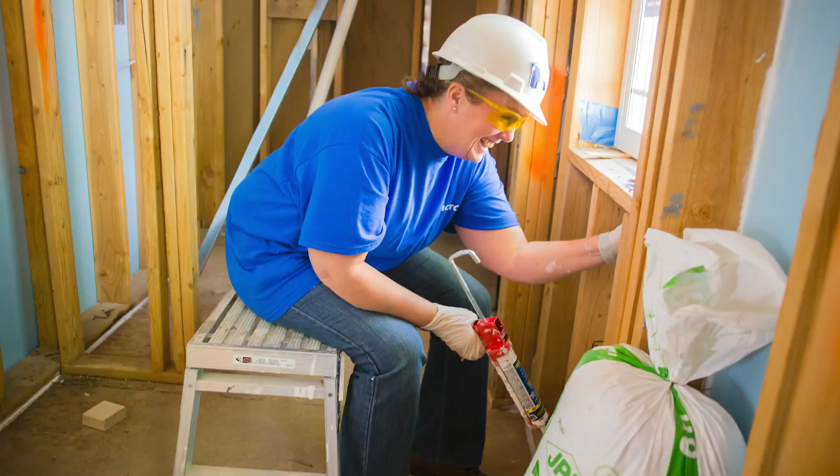Most commercial builders don't have the labor force that we do. Since we do have a lot of volunteers that come out, many hands make for light work. So we can really get lots of people involved in the energy efficient practices of just using that caulk to fill every little gap and crack.

Once we got as good as we could get with caulk, we wanted to take another step forward. So we started using a higher grade of insulation. We use a closed cell spray foam insulation in the walls. And that is a product that goes into the wall and it expands. So it finds every single little gap and crack that you could possibly imagine and seals the house up for a really tight house. When you have a really tight house though, that can cause other issues.

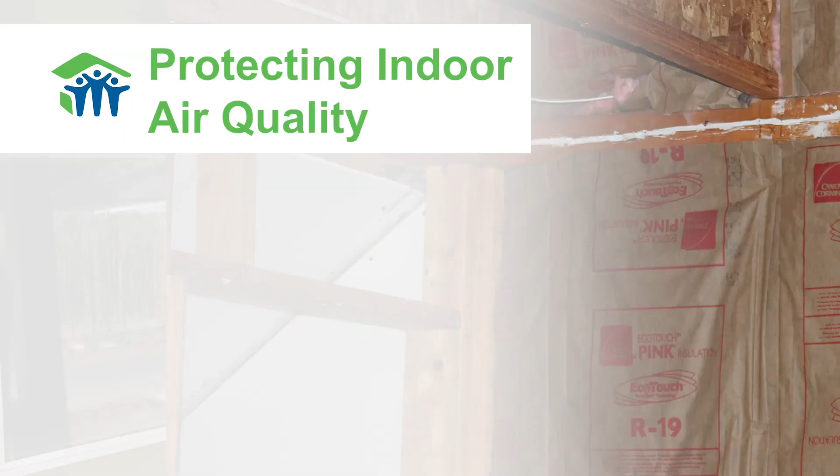So then we started to think about indoor air quality, and indoor air quality became really important. So we started using all hard surfaces for floors, no carpet. We started using all low VOC products inside the house, so paints and stains. We also have continuous ventilation throughout the house, so that's air being pulled out of the house and new fresh air being brought into the house. And that ups the indoor air quality, but it does it mechanically, so it doesn't take away from the efficiency of the heating and cooling system.

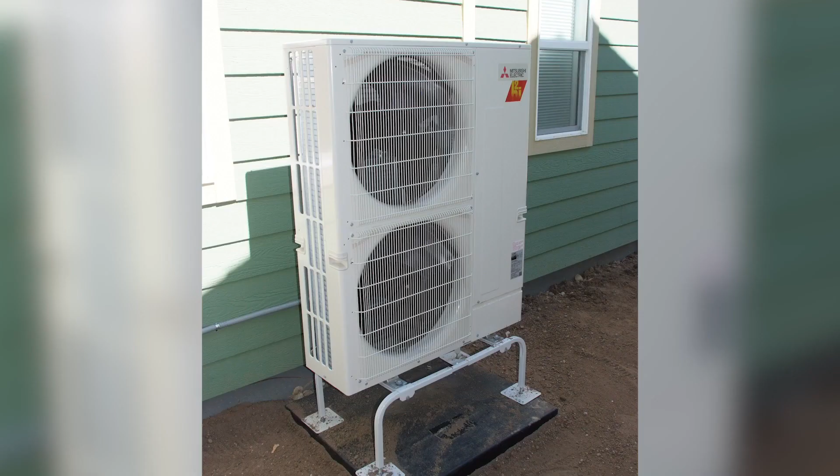These homes that we're here at are actually going to be our first all-electric homes. We are able to go to all electric, including heating and cooling, because of those energy efficient practices that we talked about. The benefit to getting away from gas is it's one less utility cost for the homeowner over a long period of time, but it's also one less cost burden on Habitat to actually bring that utility to the home. So these houses have all electric heat pump mini split technology on the inside, which heats the house in the winter and cools the house in the summer. So it acts as both heating and air conditioning.

We're actually planning a solar project. This is kind of a test case for us here at these homes in Longmont. We're going to be doing a new type of solar that is actually in the ground. It's going to be lined into the sidewalks of the houses. The solar system itself will only provide about half of the energy that the home needs total, but they will still be connected to the grid, so they'll still be able to use that electricity, and the solar will just continue to offset their utility costs.

If you want to come out and learn how to do this stuff, feel free to come out and volunteer with us anytime. We work every week, Tuesday through Saturday, and we will be glad to teach you a little more about how you can even make your own home more energy efficient.